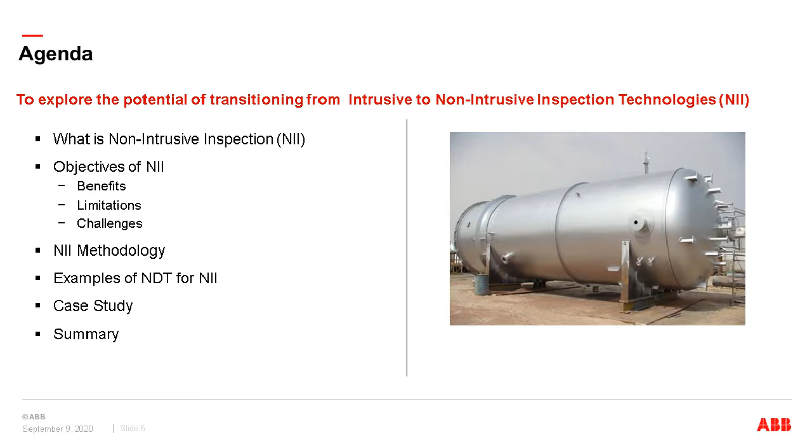Right, so let's make a start. So what is non-intrusive inspection? Well, pressure vessels often contain high hazard substances with significant stored pressure energy. Flammables, toxic, compressed gas. So it's very important to understand the condition as it goes through its service life.

Some of these vessels can be in excess of 30, 40 years old, and they can be carbon steel, and the paint system can break down.

They can corrode internally, they can corrode externally. There are many damage mechanisms that can be relevant to these. This will be a typical pressure vessel in service. You can see they tend to be cylindrical in nature to contain the pressure. They have ends, and in this case it's got a manway there to allow internal access. You can see it's connected to pipe work, some structure around it, some drain pipe work, instrument tappings and such. So that's a typical sort of pressure vessel.

Internal deterioration mechanisms would be things like corrosion and cracking, and they're likely to have severe consequences if they got to a state where the pressure overcame the corrosion or any cracking in there. So as such, pressure vessels are required to undergo statutory periodic inspection and other non-destructive testing to ensure continued safe and reliable operation.

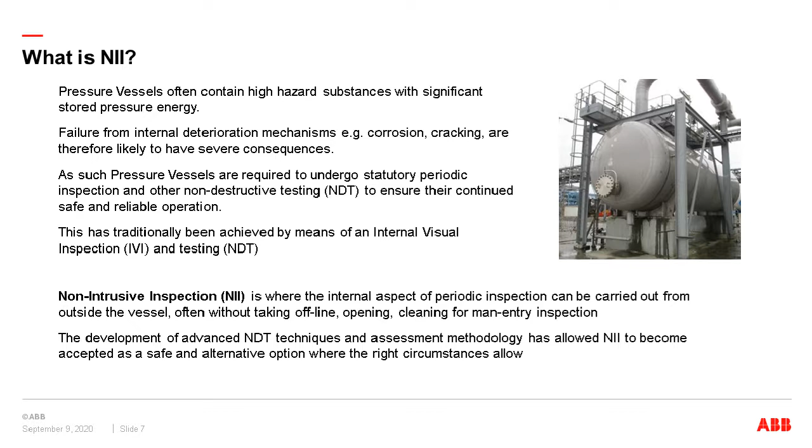The development of advanced NDT techniques and assessment methodologies has allowed this to become accepted as a safe and alternative option, of course, where the right circumstances allow. So that's what NII is, and that's what we're going to talk about.

So what do we think the objectives are? Well, the obvious one is overall cost reduction, and that would be the cost saving of not having to isolate, empty, prepare, and clean the vessel for man-entry. So there's a large saving in that.

And then also, you may be able to keep the item online in service, and therefore you've got increased uptime. So of course there's a saving in that, in that you've got increased production, less interruption to production. But there are other objectives as well.

You might want to do it, for instance, to support deferment of an internal inspection. Let's say typical frequency for that sort of vessel might be 4 years, and let's say for some reason you need to extend it by 1 year - then you might do an external non-invasive inspection to support that. Another reason might be to complement an internal inspection regime, so you might say, let's inspect internally every 8 years, but let's do an intermediate non-invasive one at 4 years. That might be a strategy that you use for non-invasive inspection.

You might have an unscheduled inspection due to operational excursions - so you might have seen particularly high temperature or perhaps high pH in the process fluid, and you've got concerns about corrosion. So to avoid bringing the plant offline, you could do a non-invasive inspection there. So that might be another reason.

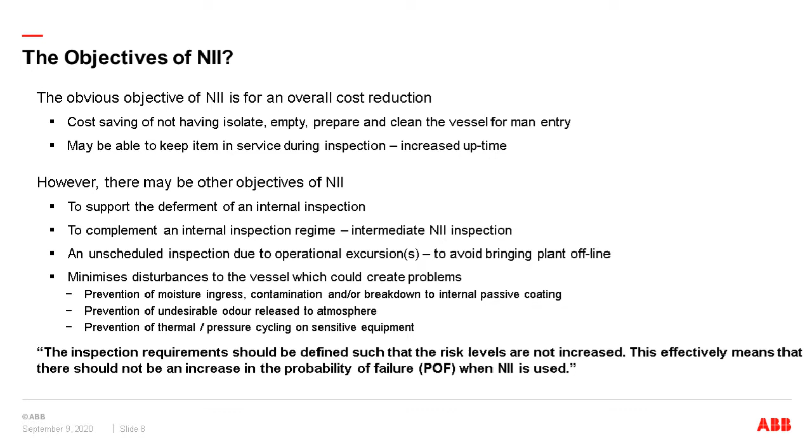Okay, so what do we think the benefits are of non-invasive inspection? Apart from the obvious cost saving that we've just discussed, it avoids personnel access, which can be hazardous. In the UK there's confined space entry regulations, and like with most safety risk assessments, it talks about removing the hazards, not putting yourself at harm. So non-intrusive inspection achieves this - it's a way of not going into a confined space. So there's certainly a benefit.

Another option is planning for turnarounds and shutdowns. If you do the inspection before the turnaround and there are any defects, it allows you to plan for that remedial work in the turnaround. Whereas if the inspection was done during the turnaround, you might not have time to order the materials and do any repairs. So there's definite benefit there.

Obviously, if there are fewer vessels to open and inspect during the turnaround, you can shorten the turnaround duration. It reduces the environmental impact - when you're cleaning out vessels with contaminants, there's less disposal. And it avoids potential damage to internal components. You might have, for instance, expensive catalysts, packing, lining, coating, or refractory. If you don't have to go inside, you won't damage or deteriorate that. So there are certainly some benefits there.

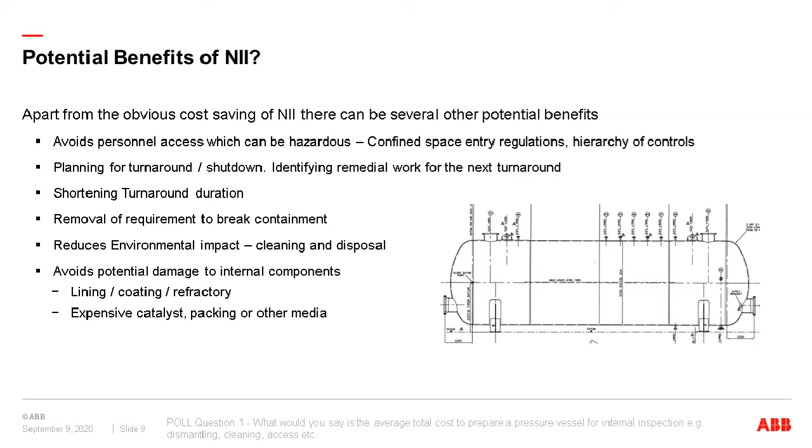Let's see how this works - this is our first poll question. Fiona? Hello? I can hear you, Dave. That's fine, but I can't see the poll questions coming up. So I don't think the poll question's coming through. Let's move on then, and we'll see the next poll question. If it comes up, then we'll take it when it does.

So what are the limitations of non-intrusive inspection? You can't do it to every bit of kit - there are certain circumstances where it might not be appropriate. If you have a lack of understanding of the operating regime, where you don't fully understand what damage mechanisms there are, then you can't really go down that route. Or if you've got a lack of understanding of the potential deterioration mechanisms and rates, same thing. If you've got high severity and rate of degradation mechanisms, so if you know there's high corrosion and excessive rates, then it's probably not appropriate.

If you don't have any inspection history, if you don't know enough about the item to know the last inspection was good, or a vessel of the same or similar duty, then again it's not appropriate. If the item's close to end of life - I mentioned some of these vessels can be 40, 50 years old - there may be numerous defects close to the minimum thickness, so probably not appropriate there. And where there are damage mechanisms that can't be detected or monitored from the outside of the vessel, maybe due to the vessel geometry, then again not appropriate.

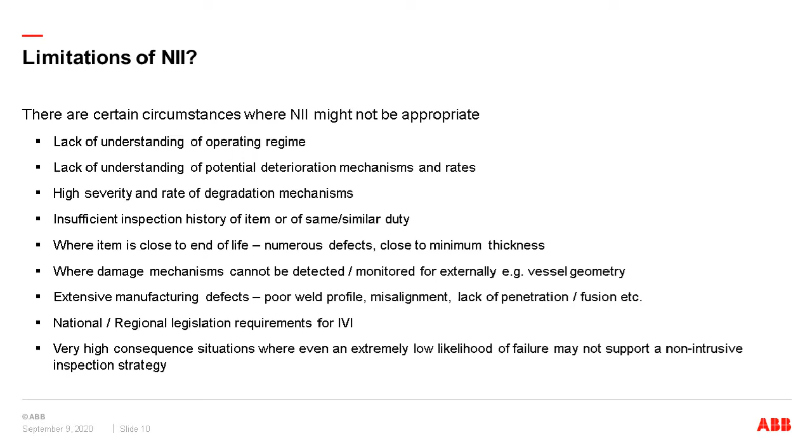There may be extensive manufacturing defects that are really hard to monitor from the outside. There may be national regulations - in the UK, the pressure systems regulations are reasonably flexible and allow you to apply this methodology. In some countries in Europe, it's mandatory to do internal inspection, so non-invasive inspection wouldn't be allowed in certain countries in Europe and around the world. And if the consequences of failure are particularly high, you might say that's too much of a risk and we really don't want to take that risk. So you may decide that's not the case as well.

Okay, so the last slide on the introduction side of things is why some reluctance. It's been a bit of a test really to start on the non-invasive side of things, and that seems to be really because of tradition. Some items are not suitable for NII, but traditionally we open them for process inspection and cleaning, and why would we do anything different? It's always worth challenging that. You get people who say, well, we've always done it this way, why should we do anything different? So it's worth challenging.

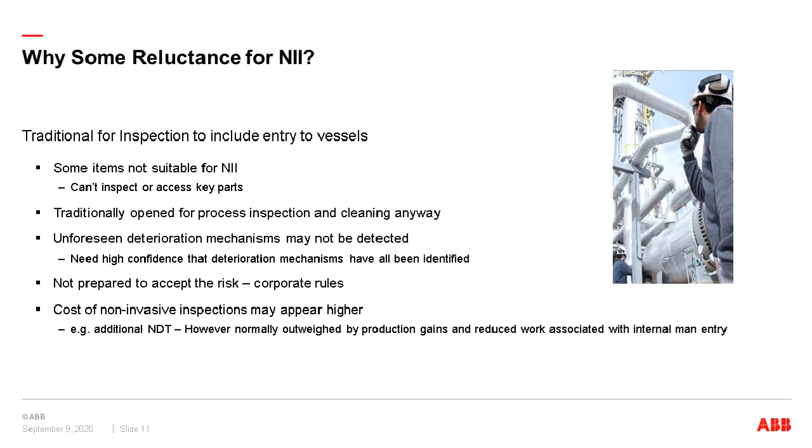It might be that there are unforeseen deterioration mechanisms that might not be detected, and you need high confidence in that. Or some corporations might not be prepared to accept the risk of non-invasive inspection, given the amount of corporate rules in that. And also - this is the last point - some organisations think it's more expensive to do non-invasive inspection because of the additional cost of non-destructive testing. Yes, sometimes there is additional cost of non-destructive testing, but that tends to be outweighed by not having to open and prepare the vessel for entry. And in most cases, that is the case.

So, what is the methodology for non-intrusive inspection?

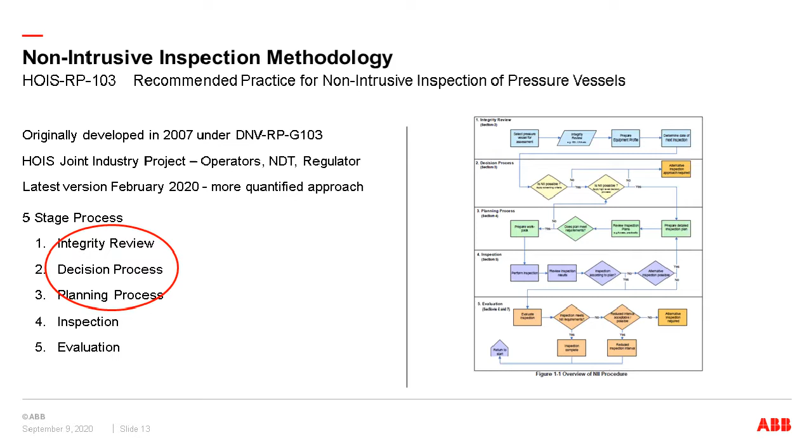You do an integrity review, then a decision process about whether it's viable for non-intrusive inspection, then you do your planning, then your inspection, then your evaluation. In this, I'm going to look around the first three in more detail. We haven't really got time to look at the fourth and fifth, and I think the first three are the most important aspects in helping decide.

The integrity review is about understanding everything about the piece of equipment you're considering for non-invasive inspection. So looking at the specification, the drawings, its inspection history, has it had any modifications, repairs, any incidents. Some of you might have heard of a process called risk-based inspection, and this is a very good process for understanding all about the equipment, its history, and what the risks and damage mechanisms are.

You then need to do a corrosion risk assessment. This is a detailed review to identify the degradation mechanisms to which it may be subject. That could be just plain internal corrosion, but there could be many others: stress corrosion cracking, hydrogen cracking, dead leg corrosion, all sorts of mechanisms. So you need to review that and make sure you identify all those.

You then also need to know about the equipment and what its integrity assessment is. What's its corrosion allowance? Where is it in its life? To what extent can it stand excursions, that sort of thing.

And then finally, what's its operational experience? Has it operated within the envelope that it's designed for? Has it had excursions? Is it likely to have further excursions that may take it outside the envelope where other damage mechanisms come into play? So that's your integrity review - about understanding the equipment, what it's subject to, its history, and its construction.

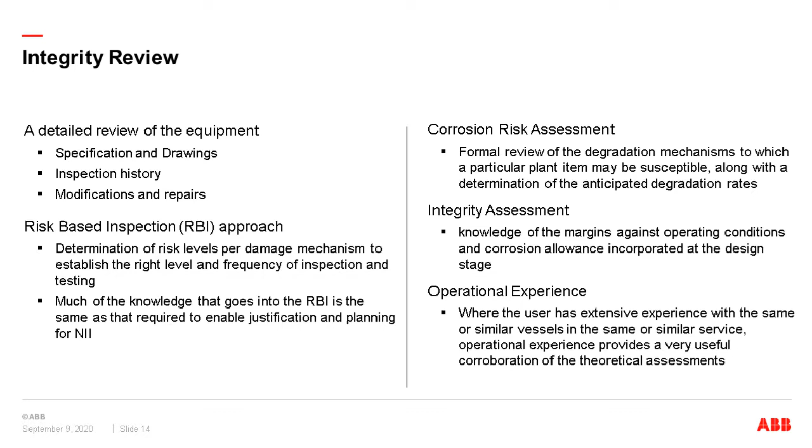The next phase then is your screening, your decision process. In the recommended practice 103, there are these selection charts. The purpose of this first stage is to quickly identify those vessels for which it's not really viable.

It asks four basic questions. First: is the vessel intrinsically suitable for non-invasive inspection? What that means is, if you're saying there's internal corrosion that you might be able to measure from outside using ultrasonic thickness testing, can you access the outside, or has it got some sort of cowl on it that prevents that? It might have internal components you can't get access to without going in the vessel. That's the sort of question we're asking. If you answer no to that, then NII is not viable.

Second question: has the vessel previously been inspected, and is the history still relevant? If you've got no inspection history whatsoever, it's hard to justify non-intrusive inspection. It might be that you've got similar vessels on similar duty that you can take credit for, in which case that might be possible. But the general rule is, if you have no inspection history for that vessel, you really need to do an invasive inspection first to verify what's taking place there.

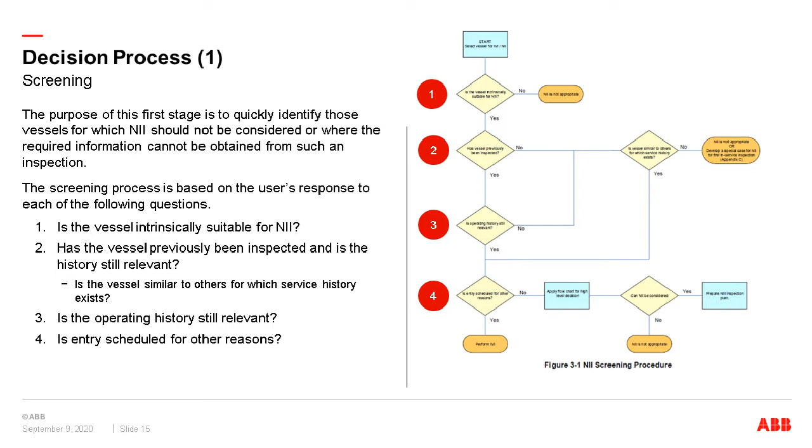So if you answered it's going to be opened for other reasons, then you should really do invasive inspection. That's the first stage screening, and it takes you through to whether it's viable or not, based on those four questions.

The next stage is a high-level decision process, following a flow chart, asking three questions. First, what is the confidence in the ability to predict the type and location of degradation? This is where your corrosion risk assessment comes in—you have to be clear that it will occur, in that location, and that you can predict the rate and monitor it with appropriate non-destructive technology.

The next question is, how effective was your previous inspection? Many times I've seen inspection reports claiming several inspections were done, but when you look closely, it's been very poor—they haven't looked in the right place, at the right mechanisms, or done the right testing. So it's about understanding how effective that inspection was, to know what the vessel is exposed to and whether that's okay.

Then there's the severity and rate of degradation. If it's a very high and severe rate, that might not be feasible for an NII. You answer these questions, and depending on whether they come back medium or low, that gives you an NII possible, yes or no.

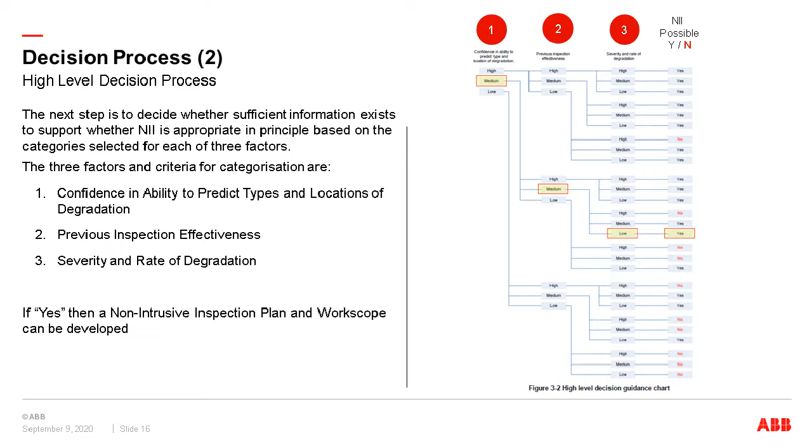So the second point is the high level decision process. If you get a yes out of that, you can go on to the next step, which is development of a non-intrusive inspection plan and work scope.

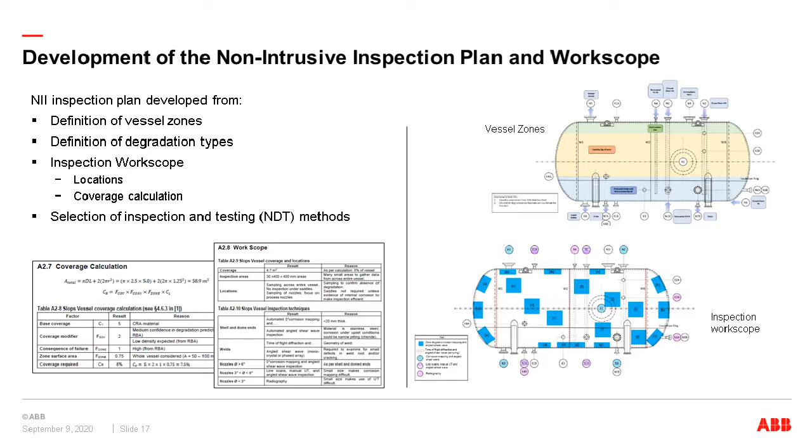This tends to consist of the definition of the vessel zones. You do a sketch according to the methodology that helps split the vessel down into the liquid side, the vapor side, and the gaseous side, and identifies where the inspection zones are for those different damage mechanisms. It also lists the work scope and coverage calculations for your testing, and you select your NDT methods. That's the third step.

Coming back to our methodology, we've ticked off those first three steps. The other two I won't cover in detail are performing the inspection and testing, and recording results and any non-conformance against the plan. Inspections don't always go to plan, so you need to record how it went, what your findings were, whether coverage was full, and evaluate that against the criteria and methodology to decide if it was acceptable.

So that's the methodology of how you would go about carrying out an inspection.

So we have our second poll question. I don't know whether that could come up or not. Dave, the audience can see the poll questions, so just carry on. And they got the answer to the first one. It's just you and me—oh, right, okay, I see, so I'll read that out then.

So what do you think the average percentage of vessel inspections could be non-invasive? I don't have that written down since I can't see the results, but I believe the options are something like 0 to 20%, 20 to 30%, 30 to 50%, and over 50%. If you can put that down, we've got some case studies later that will help answer that question.

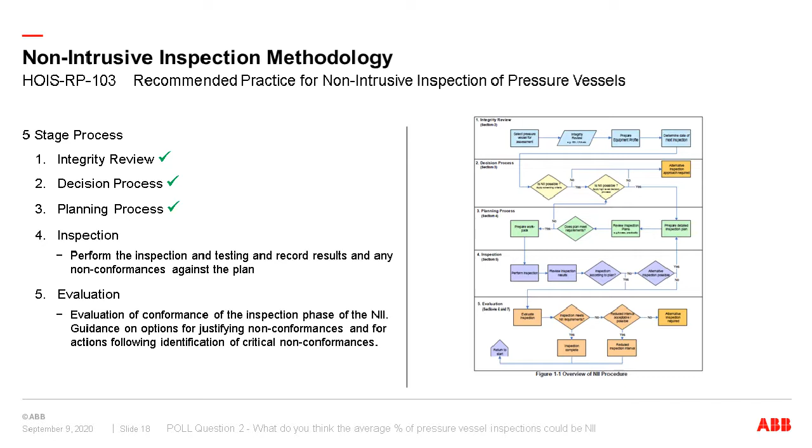Moving on, we're going to look at some examples of non-destructive testing that support non-intrusive inspection. In the methodology appendices, there are tables that help you choose non-destructive testing methods and whether they are high, medium or low effectiveness, along with the parameters for each technique. By the way, you can download this document for free from that site—you don't have to pay for it.

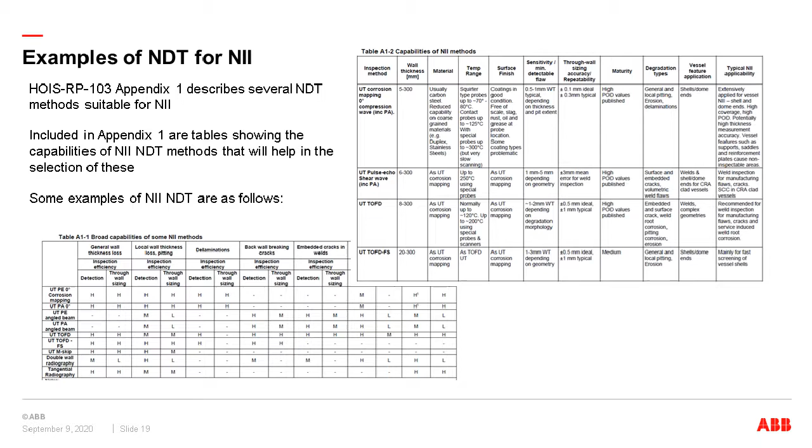Okay, so just a few examples of non-destructive testing. Corrosion mapping. This is an automated process where we're looking for thinning of the vessel shell wall, and it maps out losses in material thickness. It uses phased array ultrasonic probes that give multiple scans at high speed and accuracy.

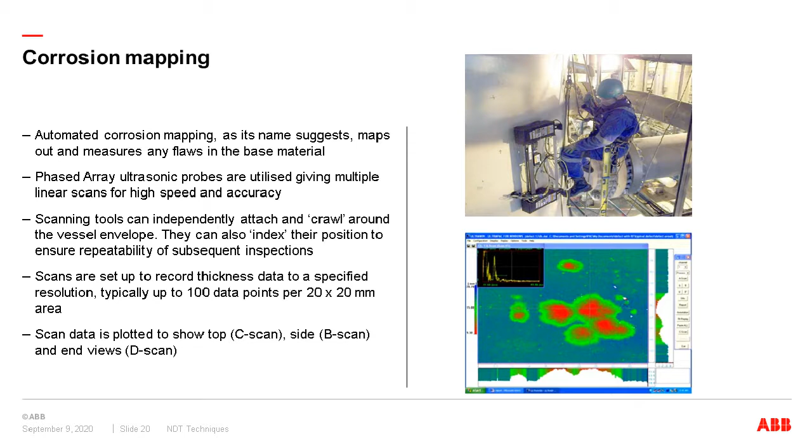Very, very effective method. You can scan large areas of vessels automatically and with consistency. So that's corrosion mapping. Another technique coming through now.

If it's hot equipment, normally conventional ultrasonic thickness testing is around 80 degrees centigrade as a maximum, but you can use specialist equipment that can take up to 350 degrees. I wouldn't say it's common, but it is possible. They use special cooling systems, special couplants, and it's automated so the person doesn't have to go and put the probe on themselves. So that's useful if you want to keep the equipment online, on hot duty.

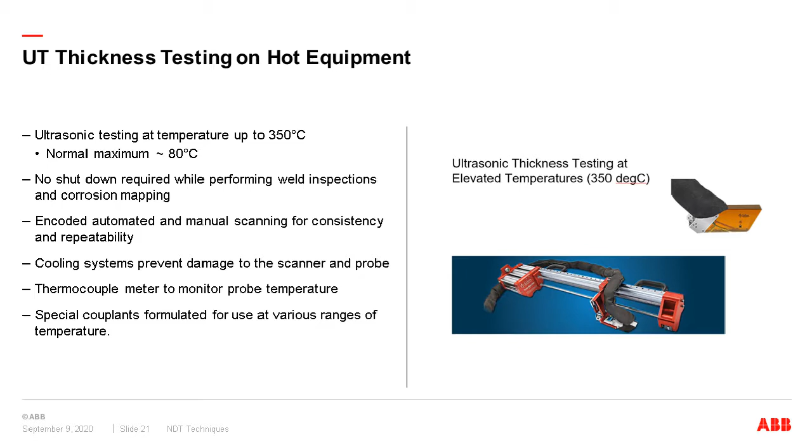Another technique, time of flight diffraction, TOFD. This is really for measuring flaws - things like cracks or features in parent metal. It uses ultrasound, with a transmitter and receiver. It sends ultrasound, and when it hits the defect, it reflects back, and it can triangulate where that is, and size it very accurately, giving an immediate report of where that is.

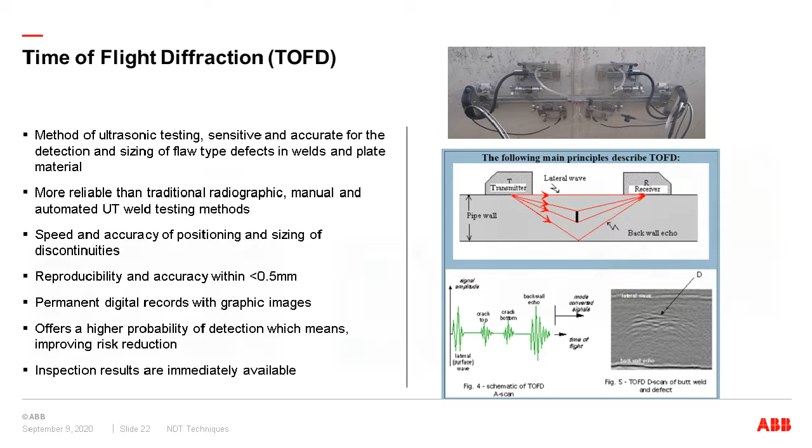It's very reliable, very reproducible, accuracy within 0.5 millimeter. It gives a permanent digital record, and it's better than the traditional radiographic and manual ultrasound techniques. You can see there, those are the two transducers, and you just roll it up the weld like that, and that can test the weld for any defects. So that's time of flight diffraction, quite a common one, very effective.

A couple more. We can do digital online, real-time erosion and corrosion monitoring. You can put probes on pipes or vessels, and it can talk back to the plant DCS or whatever through these modules by Wi-Fi, and you can online monitor defects.

Another one is tank floors. You can send robots into tank floors now, and that can measure the thickness of the tank floor. I know it's invasive, but you don't have somebody go in, you don't have to empty it out, and you don't have to prepare it for somebody to go in, so it is an advantage.

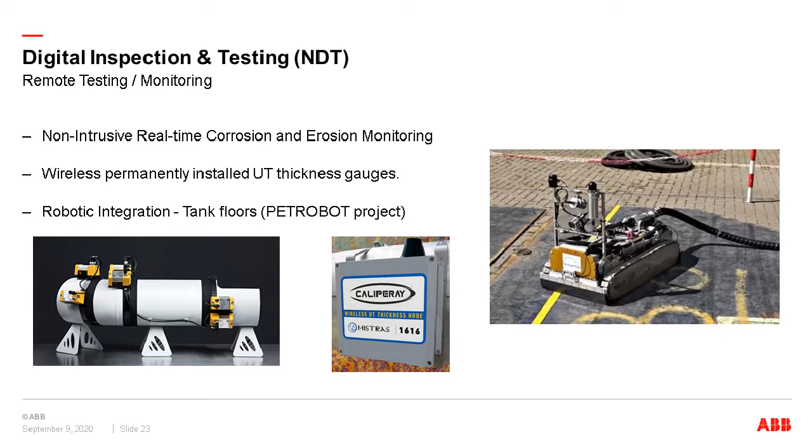Another final example would be drones. We're starting to see more of these now, and you can put these in little cages and put them in a tank, and it can fly around the tank or roll around the tank. That's another way of doing non-invasive inspection - you're not having to thoroughly clean the tank, or prepare it for man-entry. So again, useful information for things that might be hard to detect from the outside.

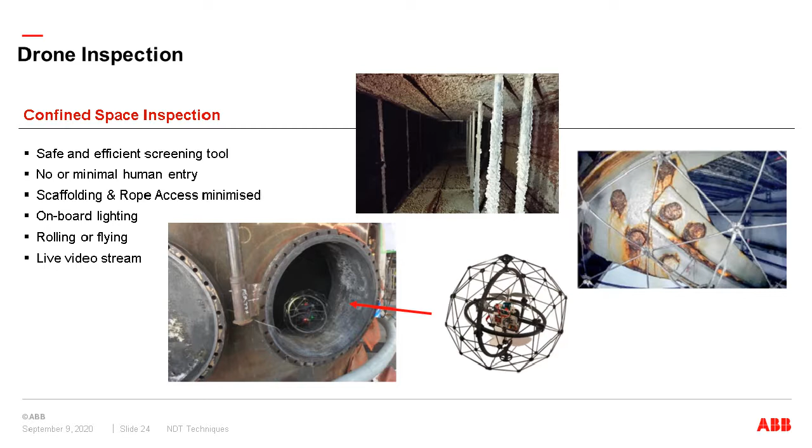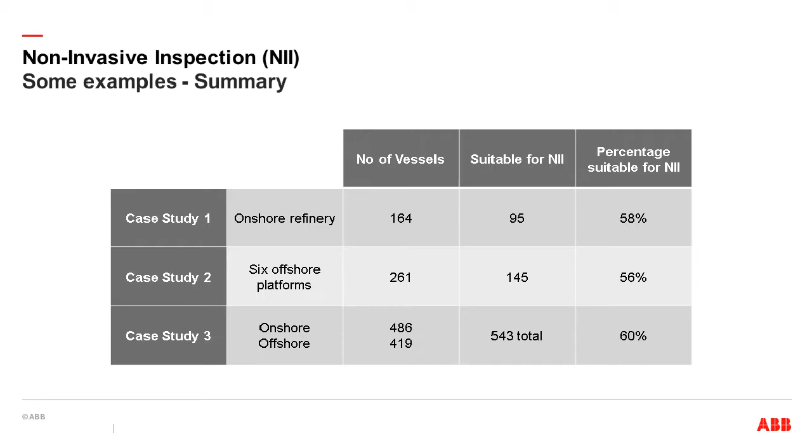Okay, so just a couple more things now. When we talked before about examples, we've got some case studies here where on an onshore refinery we did some reviews of 160 vessels, and it turned out that 95 of them were suitable for non-invasive inspection, so that's 58%. So you can get some quite high percentages suitable for non-invasive inspection depending on the process duty.

Here's another case study. This is a refinery where we looked at 540 items where they wanted to move the shutdown from a 3 to 4 year period and go non-invasive where they could. We did that - we eliminated 20% of the work scope of the turnaround, and moved it to 4 years, and 58% of the equipment was suitable for non-invasive inspection. So we managed to take a lot of equipment out of the turnaround and do that beforehand, so if there were any problems, those could be fixed in the turnaround. A lot of benefits to be gained from non-invasive inspection in that respect.

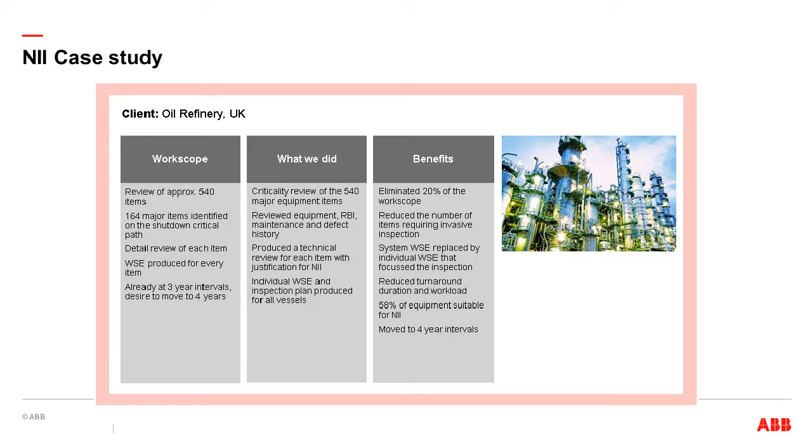Okay, so in summary, non-intrusive inspection is becoming increasingly more the norm. It's an accepted and tested methodology. The regulators are involved and support this.

There are more advancing NDT methods helping us do that, some of which we looked at. There's a drive to improve plant uptime and optimize costs, and that's helping drive this. These assessments must be carried out by competent and experienced people, qualified and experienced in inspection. It might not be possible in some countries due to national rules and regulations.

Don't forget about the other benefits of non-invasive inspection, other than cost saving, which we saw. It will still be required where the criteria is not met, for instance where the consequences are very high and the risk is not viable for a non-invasive inspection strategy.

Okay, so that's the end of my presentation. Thank you very much for listening, and I'll take any questions.

Dave, can we take questions right at the end, and we'll move on to the next presentation, and we'll come back to questions. I'm just looking at the time as well. Is that okay? Yeah, certainly.

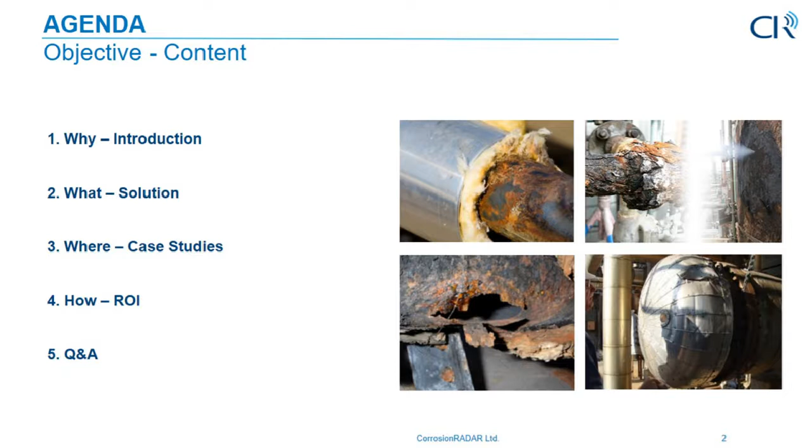I'm aware of the time, so I'll try to be faster with the key messaging, but if the audience is interested, I'm willing to spend more time than the usual time, beyond the stipulated time as well. So that's very well okay.

So let's jump into why we are talking about what we're talking about. It's because it's an era of inspection 4.0. This is an important slide, because that's how I see where we are heading. I think some of it is related to what David talked about in the previous presentation. We hear a lot about Industry 4.0 and digitalization, and what it means for inspections.

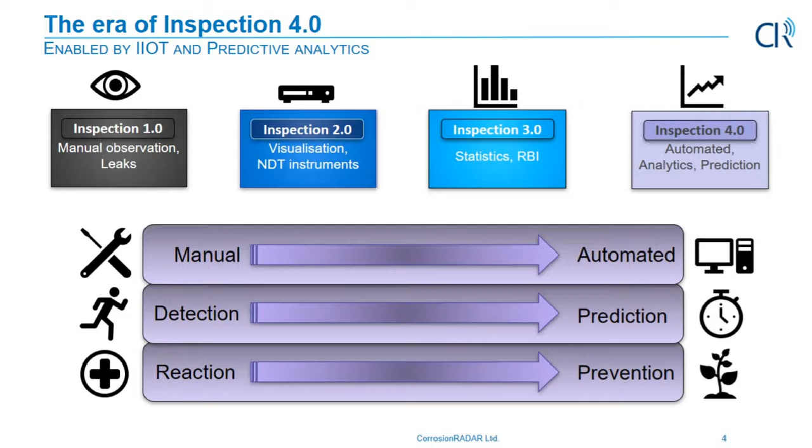Over the last 50 years, we've gone from Inspection 1.0, manual observation of leaks — in some cases still the norm — to Inspection 2.0, somewhere in the 1980s-90s, where intelligent instruments and measurement started to happen. Then in the early 2000s, people started talking about RBI, optimization of the inspection process, because the volume of pipelines is just too large. That's where we are between 2 and 3, but now industry is starting to move towards Inspection 4.0: automated, predictive, analytics-driven. Manual processes are expensive and becoming more automated, detection is becoming prediction, and reactive methods are becoming preventive.

So predictive corrosion management is a huge opportunity. Even before corrosion has happened, can we predict and mitigate it, and even schedule an inspection accordingly? This can be enabled by industrial IoT, the latest and greatest in sensors and wireless, and predictive analytics — statistics to start with, and machine learning as the state of the art.

The reason is current practice is reactive. When you're worried about equipment, the corrosion might have already happened. All the technologies right now, visual inspections or even NDT, are detecting metal loss. I understand metal loss — corrosion is an aging process, we can't avoid it, we try coatings etc. But current methodologies detect a loss which has already happened. It's like you already have a disease in your body, and you realize it very late to detect that disease.

We as human body, we know about a potential onset of a problem very early on. Can we bring the same philosophy to corrosion management? And that brings me to predictive maintenance, which is on the right hand side.

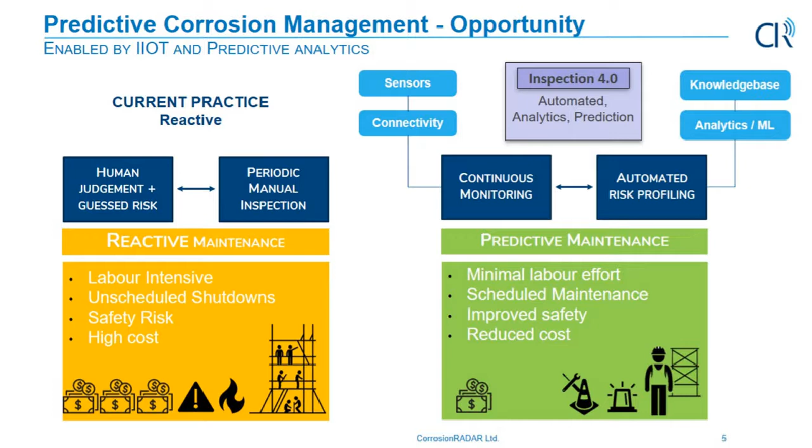You see here inspection 4.0. Can we have sensors doing continuous monitoring with knowledge base models to predict the areas where corrosion might happen, and this will lead to reduced scheduled maintenance, proper scheduled maintenance, improved safety, and reduced cost as well. So it's a huge opportunity for the whole industry.

We as CorrosionRADAR see the first application of this to be corrosion under insulation, and this is the first strategic target segment for CorrosionRADAR, and that's the reason that this is number one.

Many times it's said it's among the top asset integrity issues in oil and gas and petrochemicals. Majority of the pipeline failures are due to CUI, documented in the literature. Up to 10% of the overall offshore maintenance cost can go to CUI. We have seen high profile cases in the North Sea as well, where production losses has happened, leading to hundreds of millions of dollars loss in the production cost.

So how CUI happens - I believe audiences should be well versed with it, but just for sake of completeness - CUI is corrosion under insulation, which happens on the outside surface of the pipelines or equipments, and they are hidden normally because of surrounding insulation. What happens is normally there's an insulation around the pipes or vessels, and this insulation is supposed to be a protective insulation. They're supposed to be good things, but they can turn into devils if they allow water to go in.

And invariably, over the decades, industry has realized that it's nearly, if not impossible, very difficult to have sealed systems where no vapor goes in or no water ingress happens due to rain or even condensation on the surface. But it does happen. It breaks the coatings. It starts to corrode the pipes and sometimes leaks.

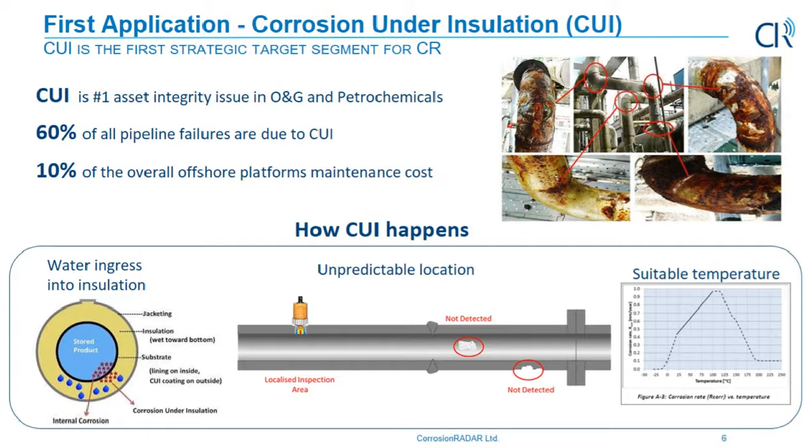The problem is unpredictable location, and because of this uncertainty, industry is spending millions and actually billions of dollars annually to locate proactively where it is. So people open insulations every few years just to find out the conditions of the assets. Can we do better? Yes, we can, and that's where the benefits of CUI monitoring comes into picture.

So why CUI monitoring? Because if you have corrosion sensors or moisture sensors - I'll describe them in more detail - you can have better RBI. David talked about RBI, risk-based inspections. It's a great tool to prioritize the inspections, to inspect only where you think the consequences or the probabilities are higher. But there is very little information coming from the field, and that's where the sensors come into picture.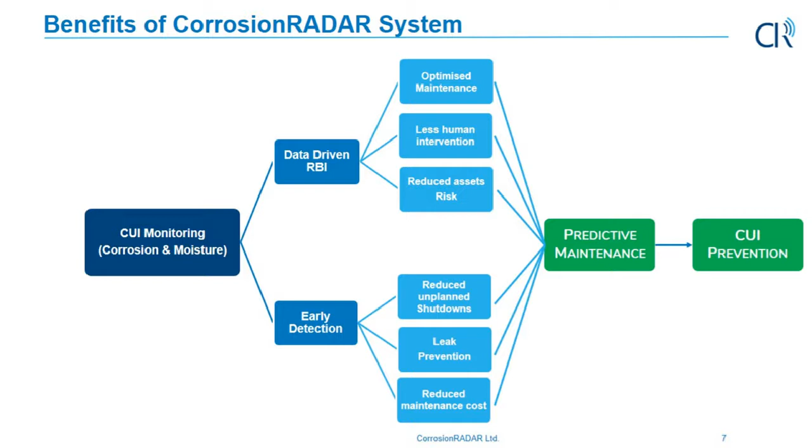Sensors can give information and we can have a better RBI process, optimized maintenance leading to predictive maintenance, leading to even prevention. If there's no RBI, even you can have early detection to that effect.

Before I move forward, I actually missed a point. Can we launch our first poll, please, which I will read out. The poll is asking: how do you rate the effectiveness of the current approach in your industry for CUI management? Answer 1 is very effective, answer 2 is somewhat effective, and the third one is not very effective. I would like to understand what the audience thinks about the problem of CUI in their industries.

I know this is particularly a problem for oil and gas and petrochemicals, but some of the audience here can be from that industry, and some will be from different industries, and the problem is different from industry to industry. So please select the appropriate answer, and then we will publish the answers as soon as possible. So please can we have the answers published on the screen?

Right, so we have the answers here. About 6% of people think it's very effective, which is a minority. 56%, the majority, feel it's somewhat effective - that's based on 17 respondents - and 36% feels it's not very effective.

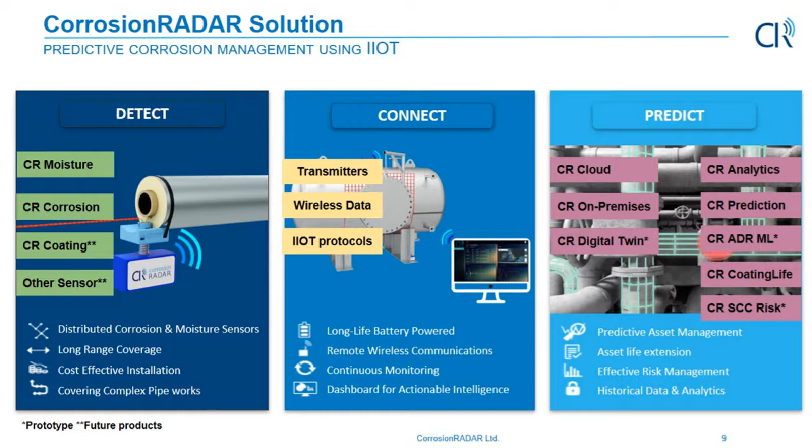So predictive algorithms are interesting, with moisture sensors you can have coating risk as a prediction, which is under development right now. The stress corrosion cracking risk - it's not a detection of stress corrosion cracking, but prediction, that without water there's very little risk, but with water the risk suddenly increases, and even corrosion risk. So these are examples of hardware and analytics which can help in decision making.

So coming back to the hardware, the first part is the sensors. Here we are showing the sensors, two types of sensors, corrosion and moisture.

The sensors are in the form of long range wire or fibers. They are embedded inside the insulation. They're installed typically during an inspection time window when the insulation is getting removed, or during greenfield when the design process and construction is happening.

The orange color shows the sensors, which can be straight length or helical or any other shape or form. Effectively they're very flexible. They get installed like a heat tracing system. They go around bends and flanges very similarly. Similarly, there's a mesh configuration as a mat, or it goes around specific high-risk areas in the pressure vessels.

So to summarize, it's embedded sensors, long-range, modular, unaffected by complex geometries. Two sensors, corrosion and moisture. Corrosion sensors cover up to 100 meters from one location.

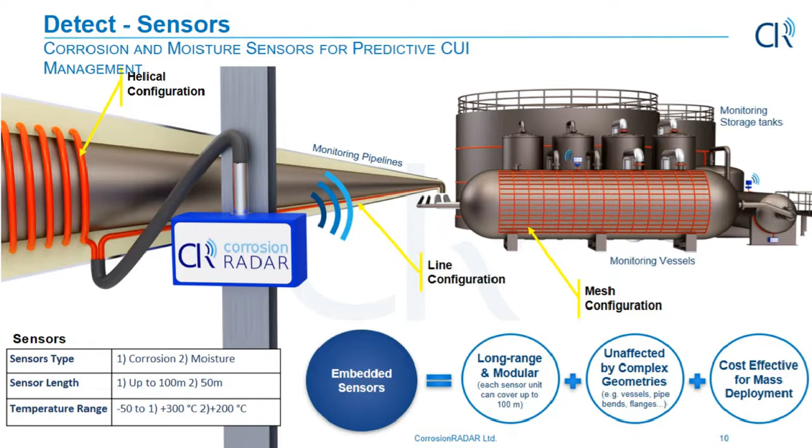So the next question is, okay fine, these are the sensors, but what is the principle of measurement? That's the next slide, which is the principle of measurement, an electromagnetic guided radar. So if you have a sensor, it's the longest coupon in the world. The external layer of the sensor is made of carbon steel, so it's kind of sacrificial partially.

But when you have the longest coupon in the world, the second question is, in that 100 meters, where is that corrosion coupon getting corroded? So we use radar principle for that, similar technology which is used in the space industry with microwaves. We send radar signals inside these sensors, which act as a waveguide, and we get reflections shown here as a signal on top of these black pipes, with locations where the peaks can be seen. Those signals are received, and with time of flight we can locate exactly where corrosive conditions are developing and moisture is developing.

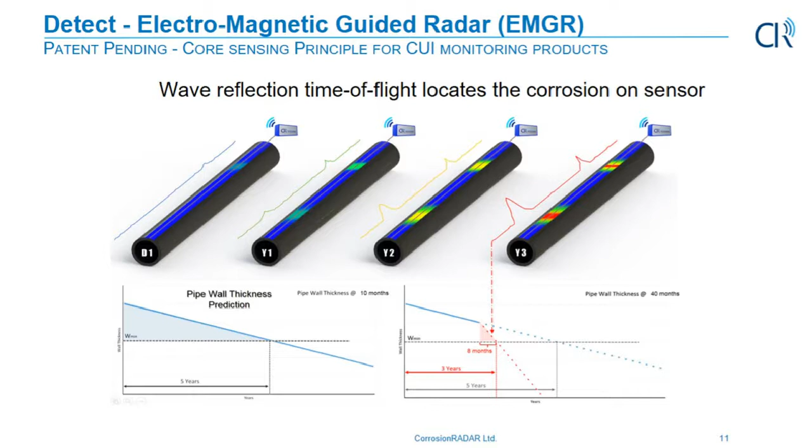So again, this is not measuring anything on the pipe, it's measuring predictively. When we say predictive, it is not an NDT technique, it is more of a predictive technique, which means before corrosion has happened, it is measuring the corrosive environment, risk profiling the assets using corrosion sensors and moisture sensors. So that's the principle of measurement.

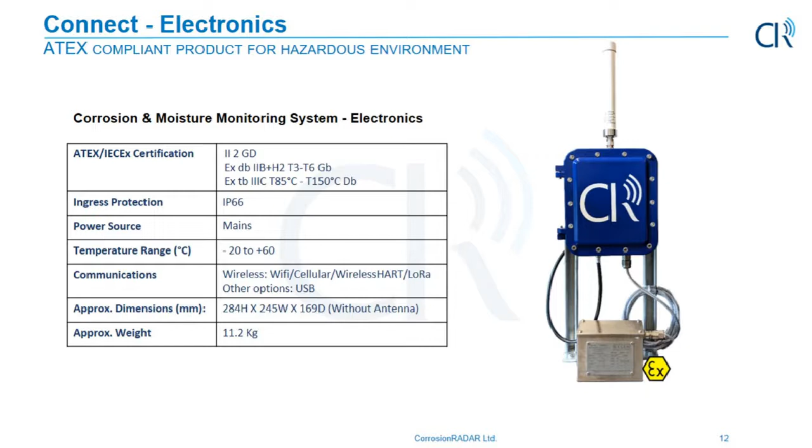And then the data comes wirelessly to various platforms of choice. The platforms are shown on top, the first is the industrial IoT cloud platform, which shows the data, a web-based access. The second one, many customers want the data to be on their premises, so we have an on-premises software platform where the data is shown there. The third one is more of a demonstrator we have made, working with some of the 3D digital twin companies which provide this service to the end users.

If you have a digital twin, we can provide the data in a format where the assets become color coded towards the risk of the asset. So if it is red, it shows the location where the risk is high. We can also move the slider towards the future because there is a prediction element, so we can see how the risk colors will change over time.

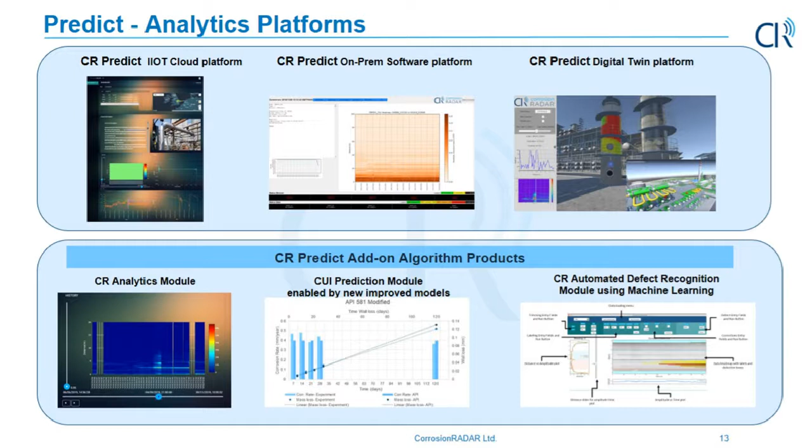At the bottom, there are various algorithms, analytics algorithms or prediction modules, be it for corrosion rates from API 581, coating risk, coating life reductions, or stress corrosion cracking risk. So there are various algorithms which can be activated on each of these platforms.

So let's see some case studies, where have these been deployed? This is among my favorites because it is a production column, a high value asset. You see the picture, this is located somewhere in the Netherlands.

This was going through a turnaround, and has a history of corrosion under insulation on the external surface. The customer was inspecting this every 5 years for time-based inspections, and spending a huge amount of cost in scaffolding. Sometimes they found CUI, sometimes they didn't, so many times it was an unnecessary exercise. They asked, can we move to condition-based inspection rather than time-based inspection?

For that, they needed a monitoring technique, and that's what we did exactly. The orange colors on the schematic show the sensors on the top and the bottom, connected via bridge cables, long cables, to the electronics in the middle. The electronics picture shows transmitting wirelessly through an antenna on a cellular network. Now this asset is getting monitored for moisture and corrosion.

The sensors, these are pictures of sensors getting installed before the insulation, and then the insulation is reinstated and shiny after that. So the objective here is, so far we have not detected corrosion or even moisture, so it looks like the insulation companies have done a very good job. But over time, if water starts to ingress, we will detect it.

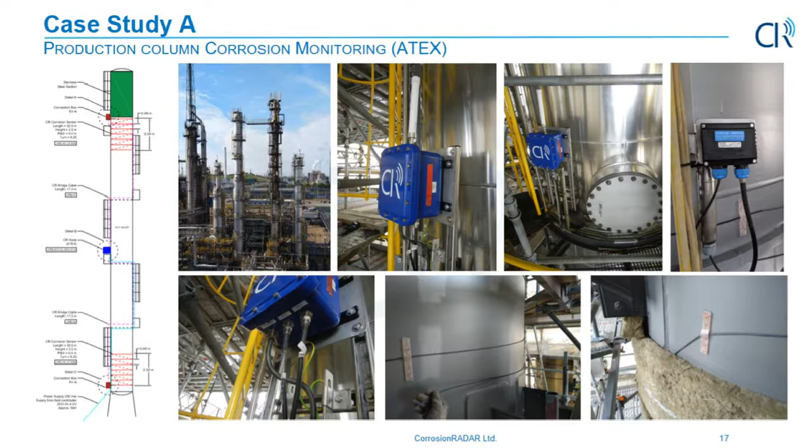Even if they find something, their objective is not to do scaffolding, but to do a rope access. Rope access is much cheaper as long as we can precisely locate, plus or minus a few meters, the square meter where water and the corrosive environment is, so they do an inspection at that spot. This can save a lot of cost to them, and that's why this is one of my favorites.

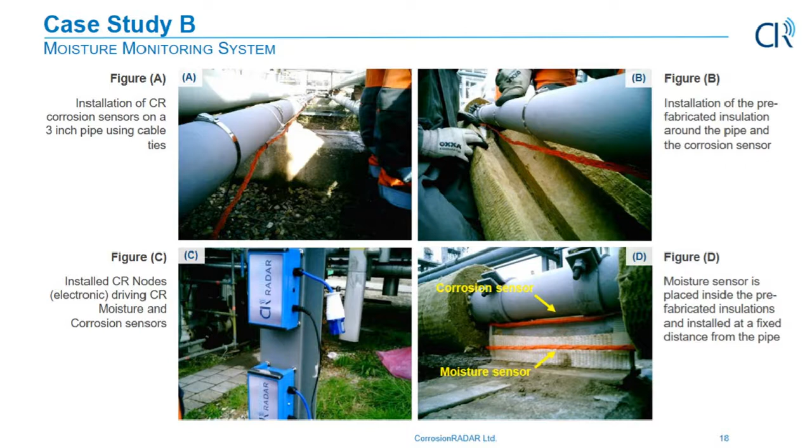Case study B is more towards moisture sensors. You can see figure D, which is a corrosion and moisture sensor at the bottom. The moisture sensor is placed at the bottom here, but it can be placed anywhere. The data looks very interesting, because this is the format we show the historical data.

The X-axis is the date, or time. The Y-axis is the distance along the pipe. At around the 22 meter location, we started to see patterns of rainfall, and it was highly correlated with the rainfall in that region. So water is getting in, which normally it's not supposed to, and that's the precise reason why CUI happens.

But there's more information here. One is the location of that problem, so customers can prioritize the inspection at that location and deprioritize inspection elsewhere. And then there are the wetting and drying cycles, which are actually one notch higher in corrosion severity, because coatings don't like these drying and wetting cycles, and this is happening here. So this will be a high risk area.

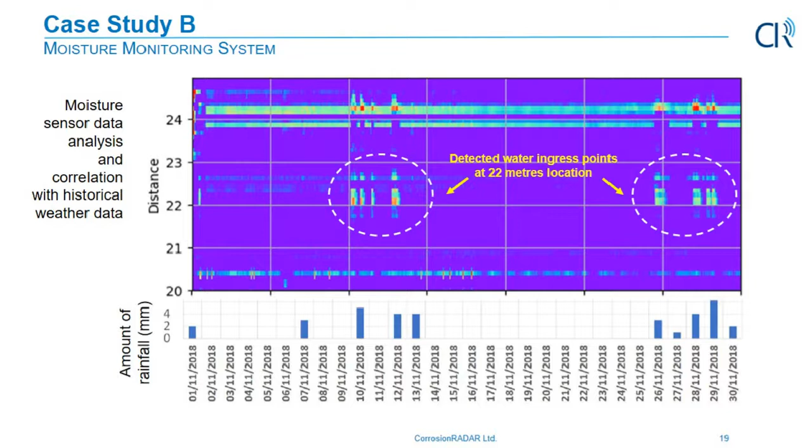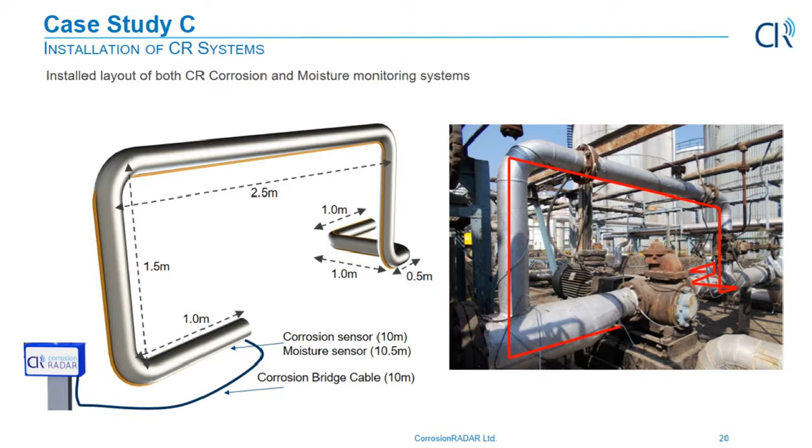Now case study C, a complicated pipe somewhere in Asia. We have corrosion and moisture sensors along this complex pipe network, let's see the results. After 9 months of data collection, after the sensors are installed and the insulation is put back, we do see a corrosive environment at the top and lowest points, and also moisture and water getting ingressed at multiple points.

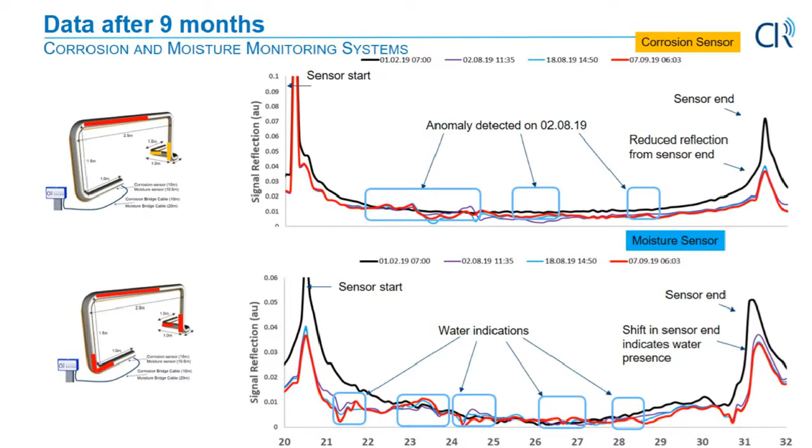Looks like the insulation company has not done a good job there, so the assumption is invalidated. Normally, the operators assume that the insulation companies are following the guidelines, so everything is perfect. But because of those imperfections, water is going in and leading to asset integrity issues. This is precisely what monitoring techniques can do for post-inspection assurance as well.

So this brings me to poll number 2. Can we launch poll number 2 on the screen, please? Because we are reaching the last part of my presentation, and we are slightly delayed, I think we will spend probably 4 or 5 minutes after 6 o'clock to handle questions and answers.

So the poll is: which of the following can improve the management of CUI in your industry? First is prevention - continue with coatings and insulations, because that's been the norm, we have been using them. Second is detection - increased manual inspections and NDT, maybe we are not doing enough, but probably increase frequency and do more. And the third one is prediction - adopt digital analytics and continuous monitoring.

So I want to understand what your views are, and once the time is up, I think we'll publish the results online and see. I'm very curious to know what your views are, as in the past you have mentioned that CUI is not very effectively managed right now. So what is the best way? So yeah, whenever the time is up, let's see the results.

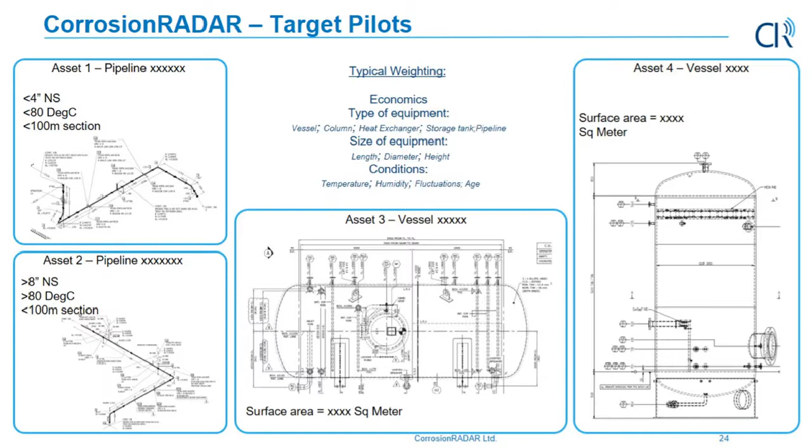I agree with this, that we need to continue, have more analytics and more digital techniques also being thrown into the mix. But we have to coexist with all of them - there's no silver bullet, all the processes, all the things need to be used. So that's a great poll result.

So coming back to our slides, normally when you are looking at digital corrosion monitoring, the first question management asks is what is the cost-benefit analysis? What is the return on investment? This is important to do, so we do this as part of the procedure. After you select the asset, we sit down with the asset owner and really find out what is the cost of inspections over a life cycle.

So we have various inputs: how many years of cycles, and in which year, how much percentage of inspections based on their procedures, and how much that can be reduced with monitoring. Can we do surgical inspections only where it is required? Can we avoid inspections when it is not needed? So the whole optimization process can lead to a lot of cost savings, and that's the output of this workshop during and before the pilot.

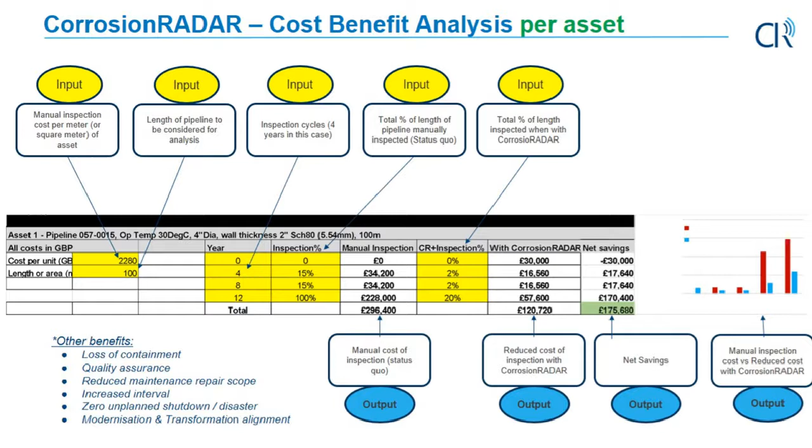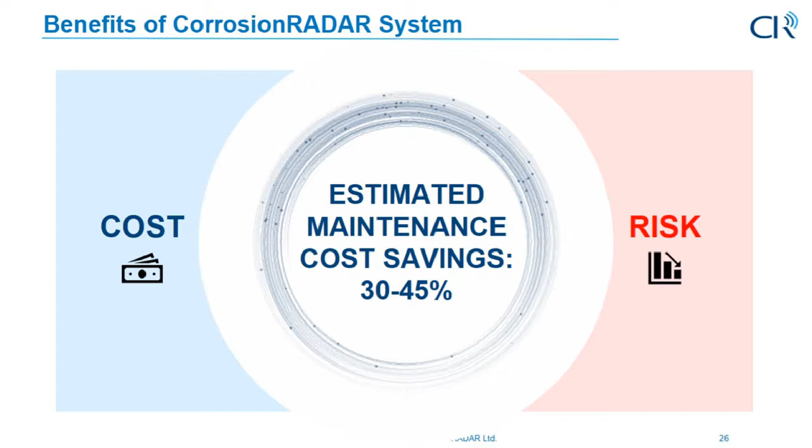We have done this in the past for offshore as well as onshore assets. Depending on the asset type, the cost savings can be anywhere from 30 to even 45%. And there is, of course, better risk management here because of the data. What I have not talked about is the RBI - the enhancements of the reliability of the RBI processes as well.

So this summarizes the last slide of my presentation: predictive CUI monitoring. Key takeaway, this is predictive. This is not detection. This is prediction, which means the philosophy is a bit different. It is geared around finding the conditions of corrosion and not the corrosion itself, so it's much earlier, which gives a lot of benefits.

So predictive CUI monitoring cost-benefit analysis and ROI calculations are very attractive for pilots to scale up. We'll be happy to discuss. Again, digitalization, this is under that remit. There are many organizations going through a digitalization drive, and this fits very well.

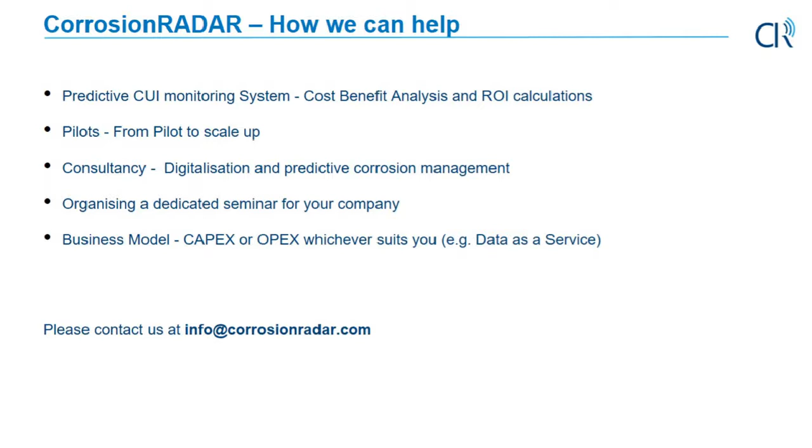Again, a dedicated seminar for your organizations, and there are various business models and methods coming up. Rather than hardware sales, people are deploying it as an operational model as well, which is data as a service. They deploy low-cost hardware, but it's like a mobile phone subscription charge—you deploy it but pay over time based on the amount of data you use. So these are the new business models coming up in industrial IoT.

So I hope this was useful, and you can contact us at info@corrosionradar.com if you're more interested in knowing more about it. I'm open to questions and answers. Sorry, it got extended in time a bit, but happy to take some answers, and David as well. So I think we will take joint questions and answers.